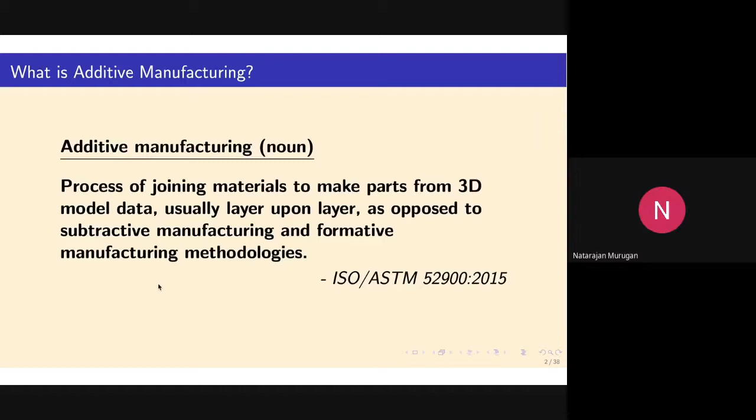Can you see my screen again? Yes sir, we can hear sir. Slightly increase the sound, the audio, slightly. That's all, okay good sir. Can you hear me now? Yes sir, yes sir. Okay fine, good, so sir.

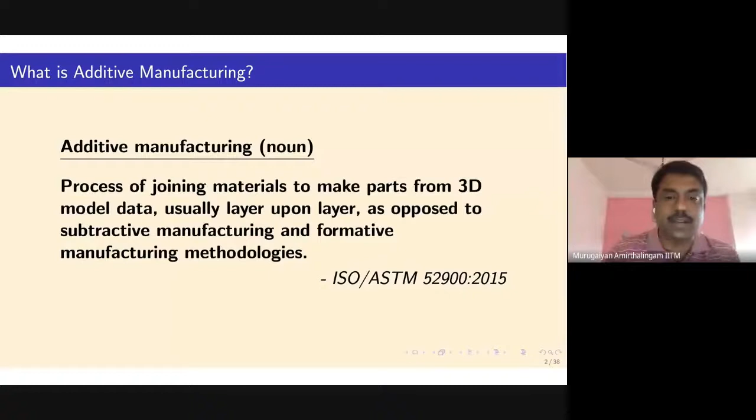In additive manufacturing, we create a component directly from its CAD data, generally layer by layer. In subtractive manufacturing, like casting, forging and machining, we don't do this; instead we create an object and then do post-processing like machining or surface finishing for the in-service application. Whereas in additive manufacturing, we create an object directly from its CAD data, usually layer by layer, and this requires careful manipulation of the CAD data to create a two-dimensional layer, then subsequently fill the layer based on optimization, so the component can be produced by adding multiple layers to get the final 3D component.

And this process is not new. People talk about additive manufacturing or 3D printing, but we have been doing this process for several decades. The process of creating a layer by layer deposition is nothing but welding - we do multi-pass welding with a consumable wire, depositing bead on bead, which is a multi-pass deposition.

In welding, the mechanical and thermal boundary conditions are different than what we have in additive manufacturing. We used to call welding-based additive manufacturing as weld overlay, but now the terms have changed because we can use the same welding heat source, like arc and plasma, or laser with a wire or powder.

We can create a layer by layer object, so people used to call this a rapid prototyping or rapid manufacturing technique, or solid freeform fabrication, especially if we use friction deposition, the tools used for friction welding and friction stir welding. Those welding processes can also be used to perform layer by layer deposition.

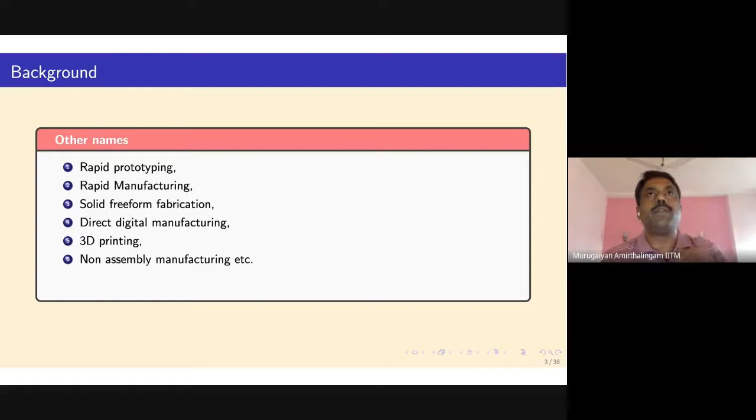Those processes are known as solid freeform fabrication, digital manufacturing, 3D printing, non-assembly manufacturing. People call this process various names, but all of them denote the same technique, what we refer academically and more globally as additive manufacturing.

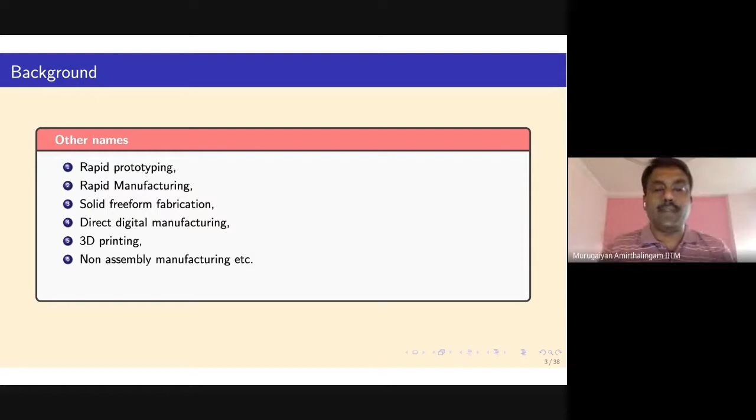Whereas if you use additive manufacturing, we create a spherical object by first slicing the sphere into several layers, and we create it layer by layer, with layer upon layer added to visualize the sphere.

The advantage of this process is we can create a component directly from its CAD data, and we can also create complex geometries by carefully manipulating the slicing and path planning programs. We can also control the mechanical properties layer by layer.

If you want to change the layer composition in between to introduce some functional gradation, if one layer should be in different composition than another layer, that is also possible. Therefore this process is becoming very attractive to produce components with enhanced in-service performance.

For example, in our group we have been working on developing components for aerospace and naval applications with mechanical properties far better than what we make with conventional subtractive manufacturing.

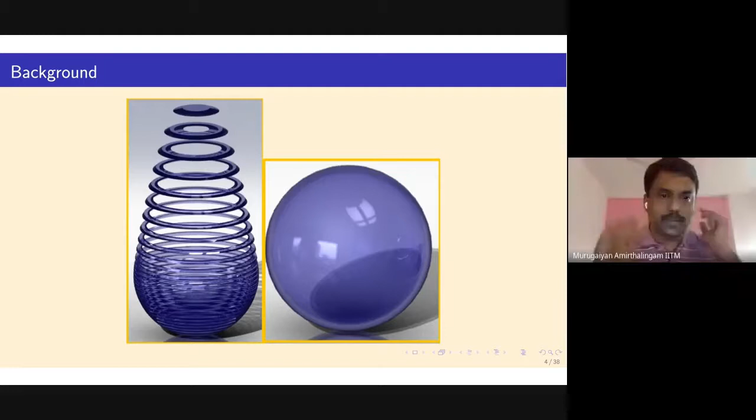Hello? Hello, sir, sir - someone is interrupting, someone is trying to ask a question. Okay, fine, maybe some disturbance. Okay fine, we'll continue.

As I said, this process is not new. Welding-based processes have been there since the 60s, but we did not call it additive manufacturing. But if you look at the first real 3D printing, it was patented in 1981 by Charles Hull.

Charles Hull, in the US, patented the first process where he produced a prototype from a polymer using a technique known as vat polymerization. He named the technique stereolithography.

That is the first patent granted on this process, where an object is fabricated from its CAD data directly, layer upon layer. That happened in 1981, and the stereolithography process is based on the vat polymerization technique. Charles Hull then developed equipment which could produce polymer-based prototypes.

He started a company known as 3D Systems, which is one of the leading 3D printing equipment manufacturing companies. From 1981 to 85, a lot of people tried to produce prototypes using a polymer-based process.

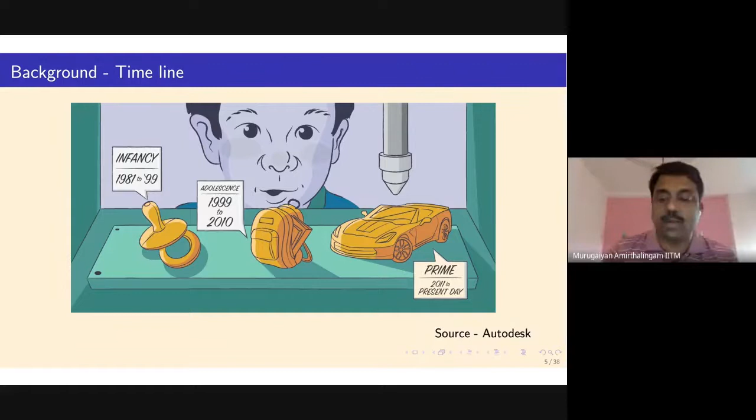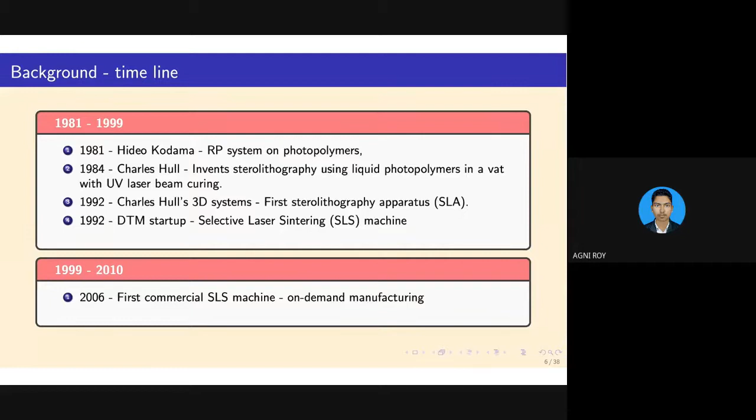Can you mute, please? Okay, yes sir, this is the timeline. I want again, further—what, hello? Hello sir, can you please— please don't disturb, please. Mute your microphone, please. Don't disturb, please. Okay, sorry.

So the timeline we just discussed: in 1981 the first paper was published in Japan, and the patent was given to Charles Hull on stereolithography using photopolymers—the process known as the vat polymerization process.

Right now we are in the prime, as I said. We have been talking about equipment used for various engineering alloys, and subsequently using the engineering component for extreme applications. Right now we are working on developing printing parameters to produce components for our hypersonic missiles. So we are moving towards the use of components made using additive manufacturing for extreme applications.

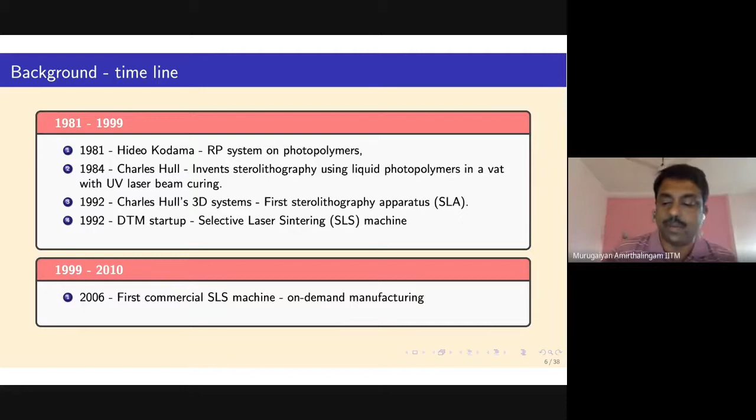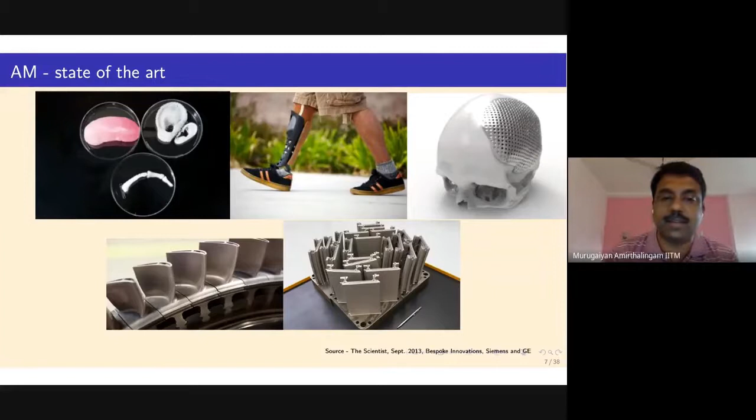We love to see this as a very attractive technique, especially for calamities and disaster management, to instantly provide shelters and help soldiers serving at the border. If they want to build a shelter, it can be built within no time using a layer-by-layer technique. At IIT Madras, we have a similar structure already built using additive manufacturing to demonstrate that this technique can really be used in real applications.

Good, so with that, we'll move on to the actual processes. If you look at additive manufacturing per se, there are only 7 processes - we can categorize these additive manufacturing processes into 7 categories. We'll quickly look at what these processes are, and then we'll move on to the topic, which is slicing and part planning.

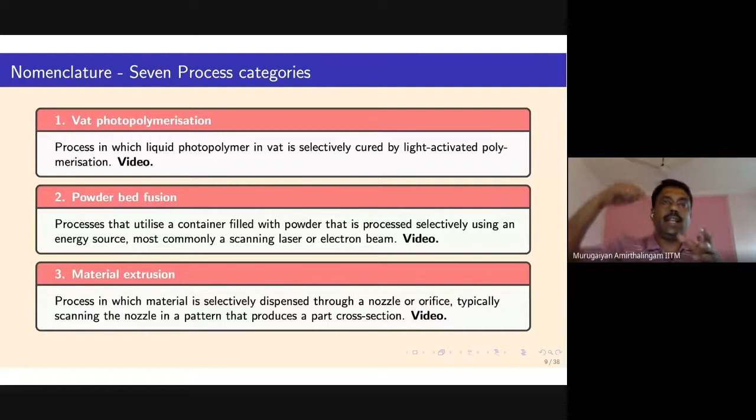So we use that technique - if you have a photopolymer in a container, and a laser or UV light falls onto a specific location, only that location gets cured. We can use this technique to selectively cure parts of the photopolymer kept in the vat.

In this process, we have a photopolymer in a vat, and we pass the laser or UV light selectively so that the layer which gets the photons cures and solidifies. When we lower the vat and fill with more photopolymer for the next layer, it gets attached to the previously solidified layer. Then we can manipulate the scanning strategy or plan the laser path to create a complex shape by selectively curing the layer. This technique is known as the vat polymerization technique.

And vat polymerization technique is also commercially known as SLA, stereolithography apparatus. So that is the commercial term given by 3D Systems. But the more academic generic term is vat polymerization technique. So the second technique of additive manufacturing is also known by various names.

But we call all the processes which use a powder bed and a laser or electron beam a powder bed fusion system. In the powder bed fusion system, we have a container filled with powder, and a heat source scans over the powder. Once the heat source interacts with the powder, it either melts and solidifies to create a solid bead, or the powder can also get sintered to create a solid bead.

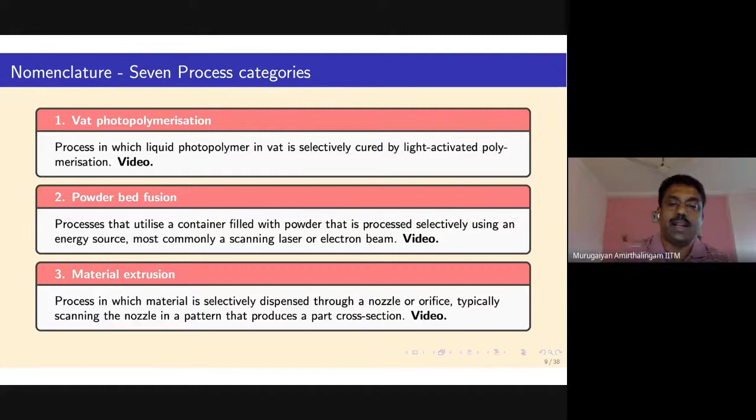This is also known as filament extrusion, so filament-based processes. These all work under the principle of material extrusion. FDM, for example, fused deposition modeling, is also a part of the material extrusion process, where a feedstock wire is extruded and deposited onto a substrate, and it solidifies subsequently to create a solid object.

And the fourth process is the material jetting process, in which a liquid feedstock is jetted onto a substrate, similar to our inkjet printing. The liquid feedstock is made to travel through a nozzle or orifice, and the droplet is deposited onto a substrate the way we want, to create a layer. The jetted droplet either gets cured by a photopolymerization reaction or by natural curing, like a wax. This process is very attractive because the feedstock is liquid, and we can create very small, tiny layers because we can control the jet we are ejecting, similar to what you do in an inkjet process.

And the fifth process is the binder jetting process. It is similar to the powder bed fusion system, whereas in binder jetting we jet a binder onto a powder bed. The powder bed can be ceramic or metal powder, and the binder is added selectively to the locations where we need a binding action, a curing action. Then we create a green part, which can be taken out and cured to create a brown part, and the brown part can be used after infiltration, for example, as a final component.

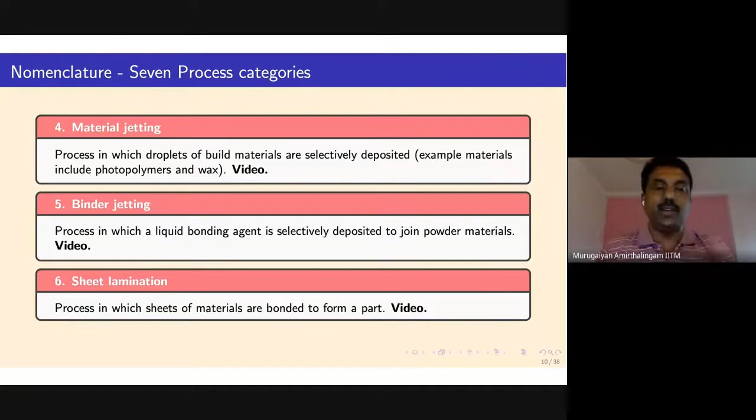And we can also attach thermocouples in the component to identify the temperature at the component immediately. So these kinds of applications use the sheet lamination process. And I do have a video, but because of the time constraint I don't want to play every video. If you want, you can also look at some of my lectures on YouTube and get some more information on this.

Good. So the seventh process, which is also similar to what we do in welding, is known as the directed energy deposition process. In the directed energy deposition process, we have a heat source and a feedstock, either a powder or a wire. The powder or wire is added, and the heat source can be an arc, plasma, laser, or electron beam. This heat source melts the wire or the powder which is getting deposited. Subsequently, the molten droplet is transferred to the base material.

This is similar to what you have in welding. So during this deposition, we can move the heat source along with the feedstock so that the droplet can be deposited on the locations where we want to get the layer built. So this process is known as directed energy deposition.

And a lot of commercial names are available, for example LENS, laser engineered net shaping. So it is a directed energy deposition process. Or WAAM, wire arc additive manufacturing. That is directed energy deposition. Or EBAM, which is Sciaky's brand name, the electron beam additive manufacturing process, or the electron beam melting process. So they are all what we can call directed energy deposition processes. Good.

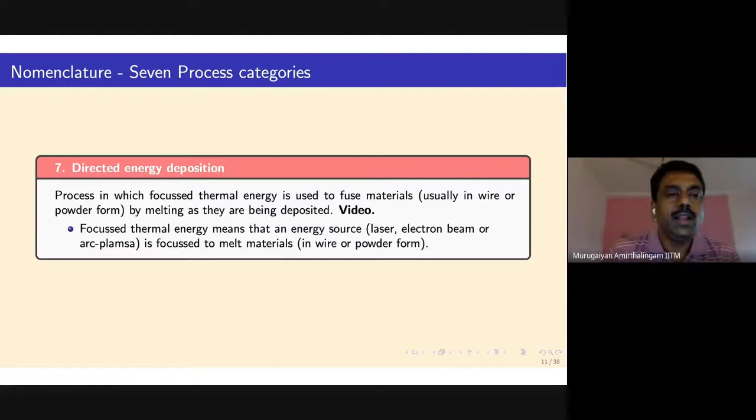So if you look at all the seven processes, we have a common process chain. First we identify what material we want to use to make a component in a given technique. So we identify what process can be effectively used to create a component out of this material. That is our first exercise.

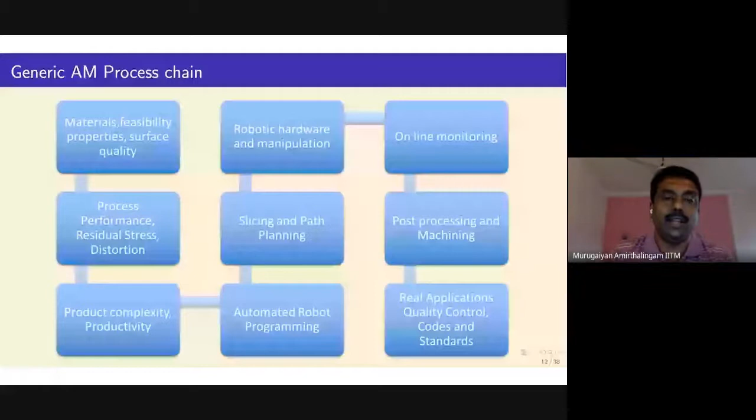For example, if you want to build an acrylic prototype, you cannot use a directed energy deposition system, DED. You can never produce that, because polymers are very difficult to control in their melting behavior with the laser or electron beam. So to produce a prototype using acrylic, the best we can use is the vat polymerization process. Similarly, we do a careful analysis based on the materials and the surface quality we expect from the final printed components. We can identify which process is best suited to produce these components.

Right, so once we identify the materials and the process we want to use, then we do extensive mathematical modeling to understand the material behavior when we do printing, including the process simulation. So when you are depositing a single bead, how is the bead going to shrink when it either polymerizes or during solidification? So that we can adjust the actual deposition speed to create the required geometry of the bead.

And when you do multi-pass deposition in a thin wall, because of the excessive heat we add, it can also induce residual stress and distortion. And we need to correct that distortion as and when we build, because otherwise you would need to machine it later. So we can correct the distortion when we build layer by layer. So we do extensive mathematical modeling to understand the process performance and the residual stress and distortion. One of the exercises we do is the calculation based on the residual stress and distortion evolution to identify the effective path in which we can fill a layer.

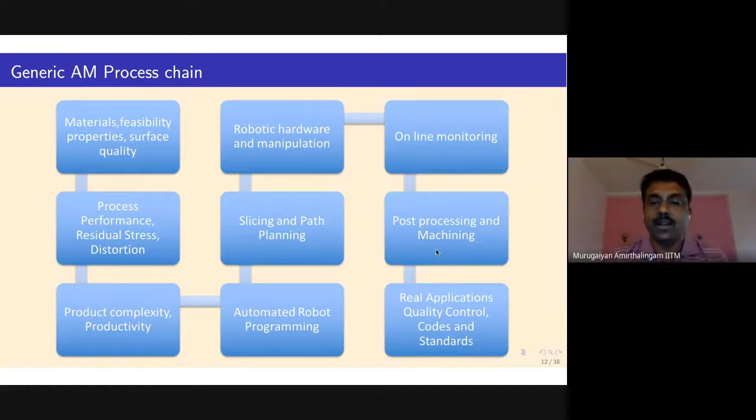Once we have the paths generated, we generate G-code and M-code and give it to the robot, and subsequently we can monitor and print the component and take it out. If any post-processing is required, we do that, followed by post-print quality control. So this is the process chain we use, right?

Most of these steps require knowledge of materials and the process, the heat source behavior, and the mechanical boundary conditions prevailing during this process. So we make use of all the fundamental knowledge available in welding to generate effective ways to create components using additive manufacturing.

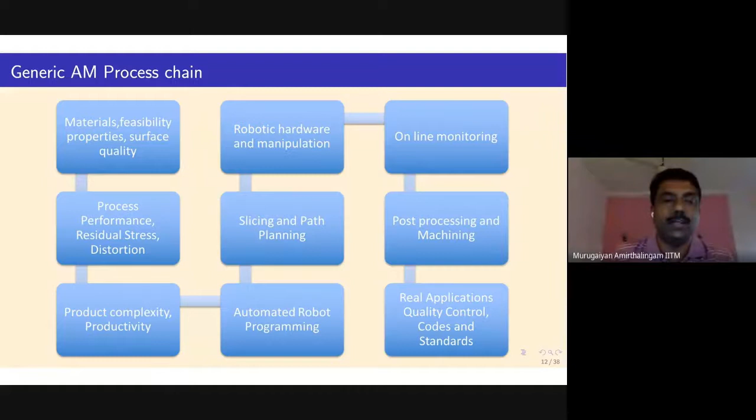So this is a simple process chain visualized using pictures. Suppose you want to print a cup to drink coffee using additive manufacturing. We start with CAD data.

The first thing you do is convert the CAD data into what's known as an STL file, okay, the standard tessellation language file, where we create from the CAD data an STL file by filling this CAD data into a lot of triangles. So we fill that with triangles, right?

And we convert, using this process, 3D data into two-dimensional data. By filling the entire geometry of a 3D structure into triangles, we can design the entire shape using a two-dimensional data set, by declaring the vertices of the triangle and the surface normal of the triangle. So each location, each point in the geometry can be carefully constructed into two-dimensional data.

Once we have the STL conversion, we slice the STL file layer by layer, and once a layer is created, we plan how we are going to fill that layer by again optimizing the paths, so that we can fill one layer and then feed the feedstock, or lower the axis of the build direction, so that we can create the next layer.

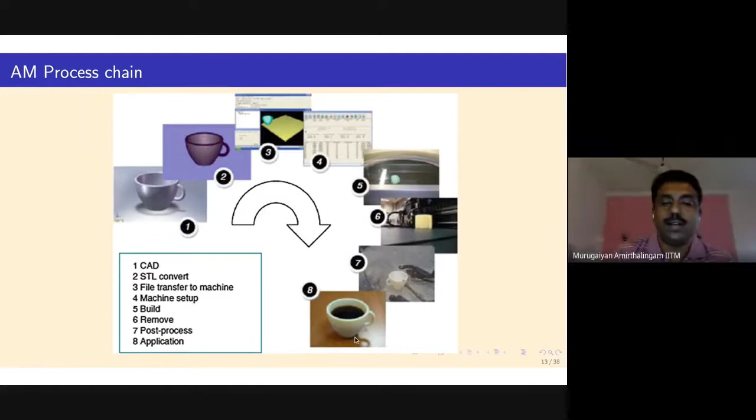So this is the actual process chain we carry out, and subsequently we can create a very nice coffee cup to drink warm coffee.

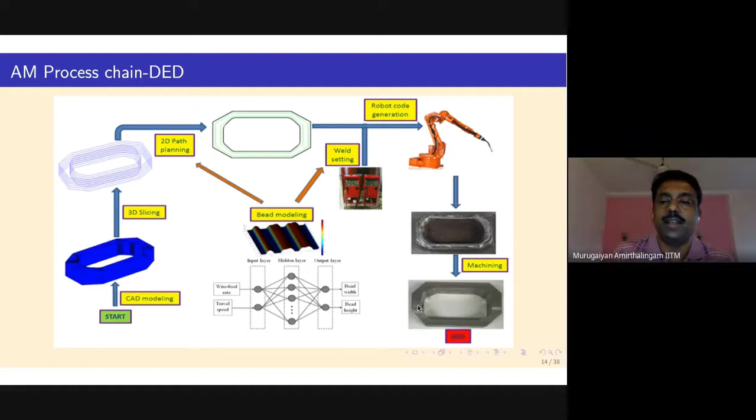Again, visualization of what is shown here: we have a CAD model, which is converted into an STL file where we fill it with triangles and do a slicing. Once we create a single slice, we carefully understand how this slice can be filled using path planning. Once you know the paths, you can generate robotic code and fill it, and finally, after post-processing, the final component can be printed.

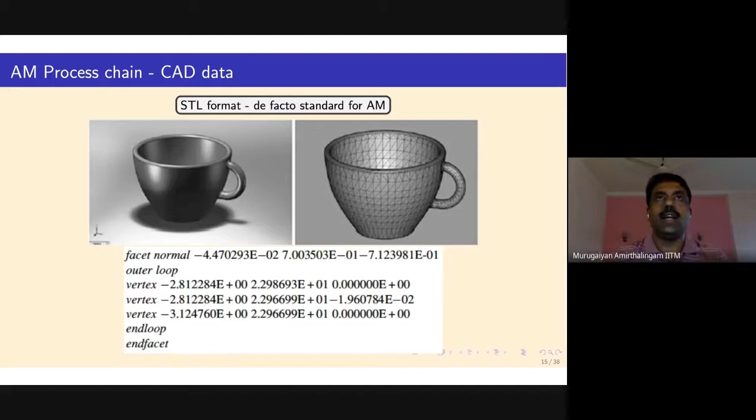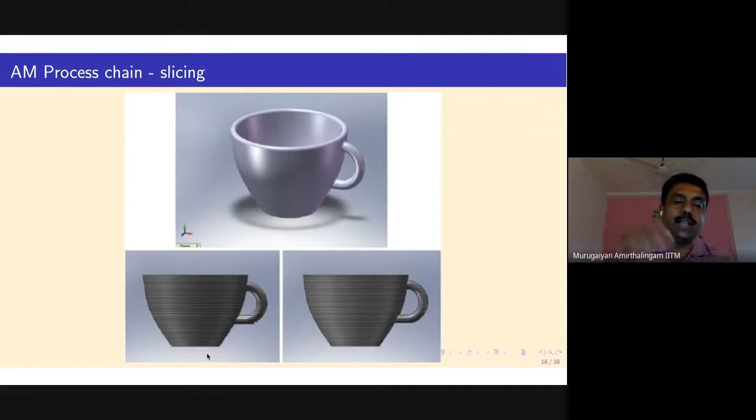Once you have 2D data, it's easy to slice because each layer is actually declared only by two-dimensional data information, right? So subsequently, once you have an STL file, we can slice it, and the slicing can be uniform slicing or adaptive slicing—we'll come back to that later.

So uniform slicing, we slice into a layer thickness that is constant across the geometry, or we can also do adaptive slicing. The adaptive slicing is also beneficial when we have a component with a varying degree of curvature.

Adaptive slicing is very beneficial to achieve a good surface finish and avoid the so-called staircase effect. Once you have adaptive slicing, we can identify a slice component with respect to the actual intersection of the cutting plane with the triangles described in the STL file. Once you know the intersection points, we can connect them to create the actual layer.

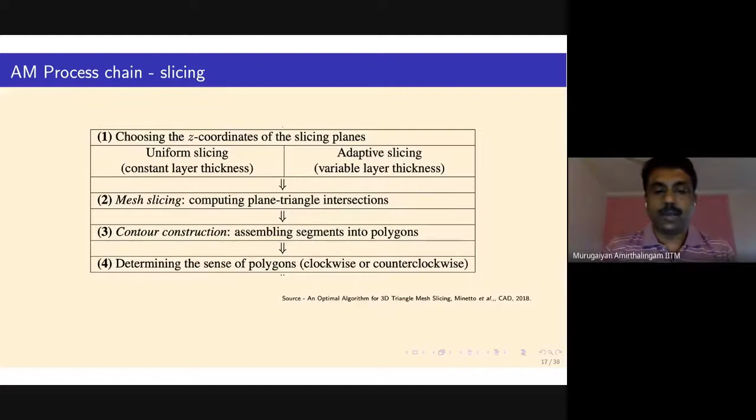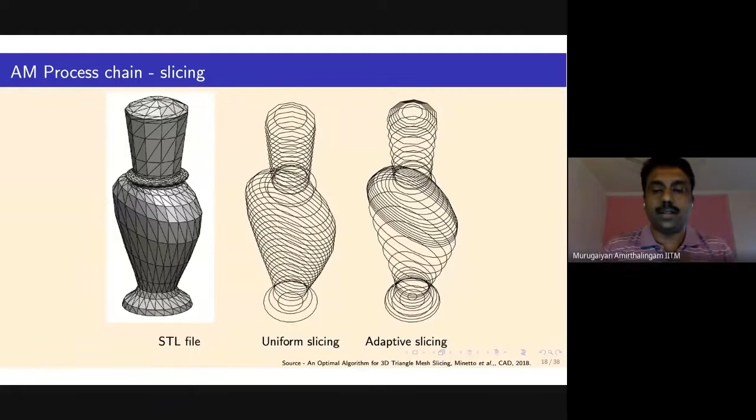This is an example of an STL file with triangulation showing uniform slicing, where the slicing is constant, or you can make adaptive slicing so that the curvatures are obtained without much deviation from the geometry. Adaptive slicing is generally done to achieve a good surface finish and nice geometrical accuracy as required by the produced component.

Say for example you have a curvature like this, and if you have a constant layer thickness, you end up getting staircases - that's what you call the staircase effect. So we use an algorithm to achieve the required geometry and surface finish by using adaptive slices. You can see how effectively adaptive slicing can be used to get the required geometry generated when we print layer by layer.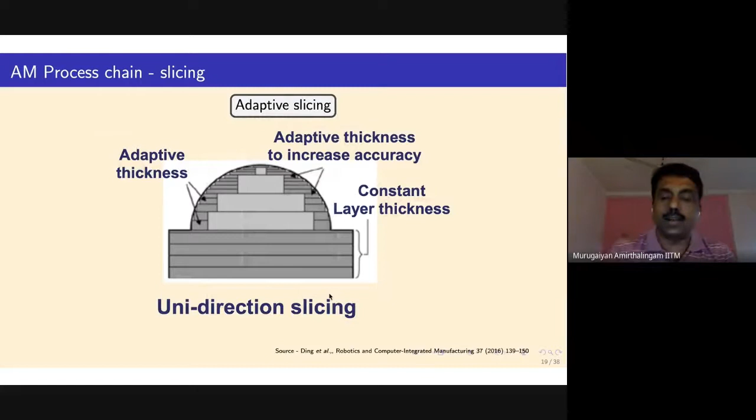The slicing can also be multi-directional. Right now this is unidirectional slicing, done in only one direction. If you have overhanging features, we have a problem. Suppose you want to produce such a component for end use - if you do uniform slicing, you'll have to have a support structure made. Otherwise we can't generate an overhanging feature.

So for that, what we do is what we call multi-directional slicing. We slice it up and change the direction of the slicing, so that we have avoided the support structure requirement to generate the overhang feature.

The only problem is when you're actually using a laser or electron beam as a heat source and it's downhand - we'll have to make sure the component is tilted to the correct angle using a 2-axis rotation table. That is the best way we do it, because when you manipulate the heat source, the heat transfer and droplet transfer, especially in DED processes, is very tricky. So multi-directional slicing for DED processes is always carried out with a 5-axis system.

This process, multi-directional slicing, is generally not used for powder bed systems because you already have the support of the powder. So multi-directional slicing is primarily advantageous when used in a DED process.

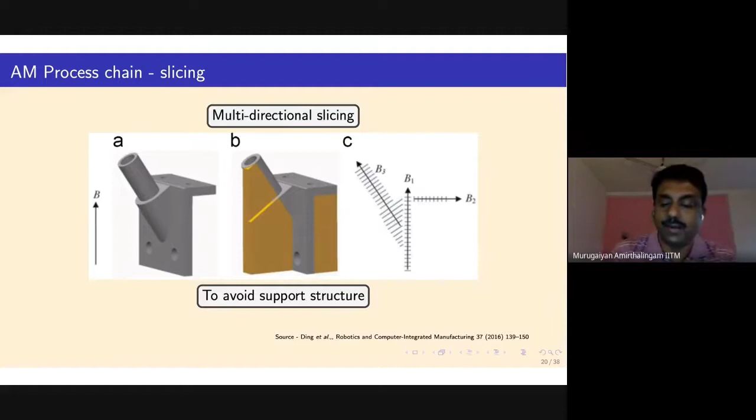These are some examples of multi-directional slicing - this is a gland made using Inconel 625, which we can develop using a DED process and slicing. We also have adaptive slicing and multi-directional slicing, and this can be realized very easily.

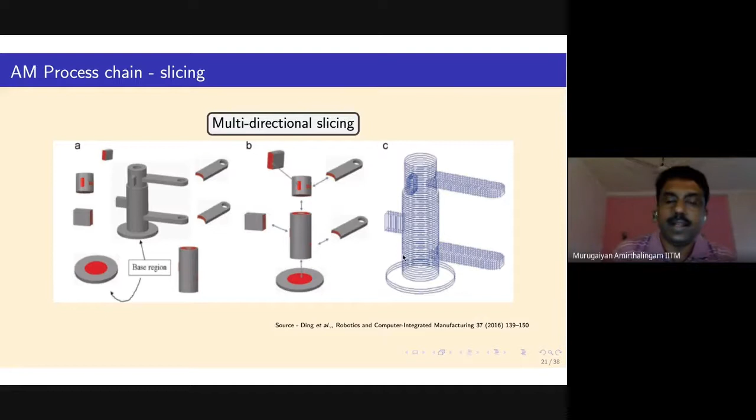So once you have a slicing, we'll have to identify for each slice layer how we are going to fill it, by carefully understanding the path planning algorithms. So this is again to summarize the slicing process.

We have a shape, say a cube with a void inside. We fill it with triangles, then slice it, identify the intersection of the slices with the triangles, and connect all these intersection points to get the actual slice layer.

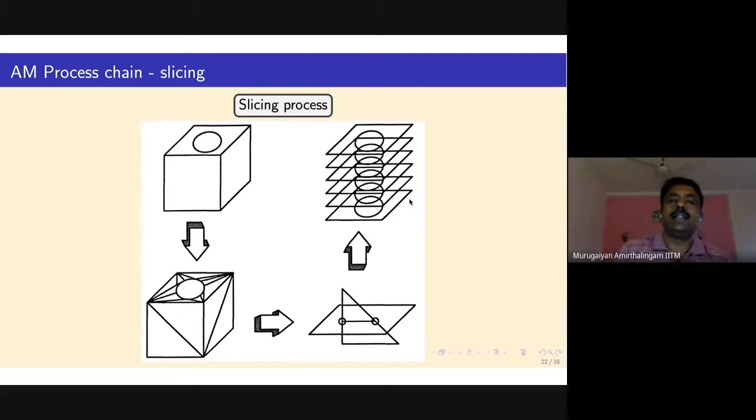Once you have a slice layer, we'll have to fill that slice layer with beads. So the laser or electron beam heat source moves, either in the powder bed system or the DED system, or even in other manufacturing processes like material jetting or binder jetting, to create a bead. Here are some nomenclatures before going into path planning.

The bead is nothing but the actual geometry of the single deposit we create - the bead height and width, and this is the substrate. Suppose we have a powder bed and the heat source, we create a molten layer which subsequently solidifies - that is what we create, and this is the actual bead we call it. Bead height and width is determined by the heat source characteristics and the heat transfer prevailing in the atmosphere, which we can calculate from physics for a given laser heat source.

So what is the material we are going to melt, and when the melt solidifies, what is the actual geometrical shrinkage it undergoes? Now we can create the actual bead in the computer using a thermodynamic-based solidification model with information about the fluid flow, so we can understand the bead geometry.

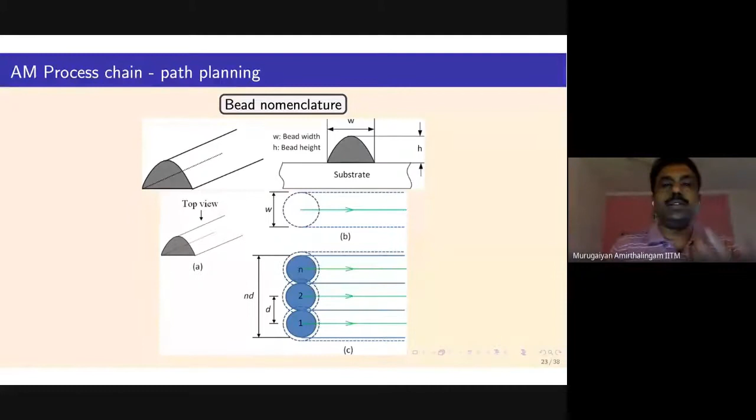I'm not going to go into detail about how we calculate the bead geometry, but once you have the beads, we can identify how the deposit is going to take place, to optimize it.

Some basic understanding in multi-layer deposition: first, we make sure we understand the bead geometry, height and width. Then we calculate the overlapping distance required to achieve a flat layer. This is known as the step-over distance, or in commercial terms, hatch distance.

Once we calculate the bead width and height, for the next layer we deposit a second bead, and the overlapping distance should be such that the critical valley and the overlapping areas are the same. If the overlapping distance is too small, we get a lot of valleys left; if the overlapping distance is too much, we may get what is known as humping, and the dimensional accuracy is hampered.

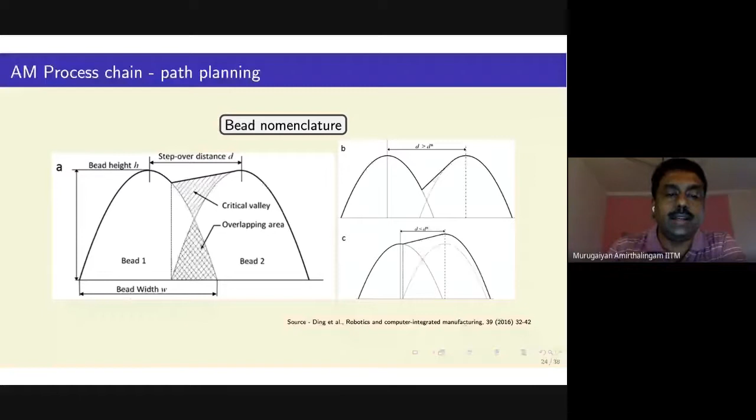So again, we calculate from the bead height and width characteristics the overlapping area required, so that we get a very nice flat surface, as shown here in C.

If the step-over distance is too high, we get a valley generated by inadequate overlapping, and if the overlap is too much, we get dissimilar beads created. If it's very small, you'll get a humping bead. Generally we identify the critical step-over or hatch distance to get overlapping such that the critical valley equals the overlapping area.

Once we identify the bead geometry, the next step is how to fill a given layer — that's where path planning comes in. Path planning is about filling the slice we create without any crossover, and achieving defect-free deposition.

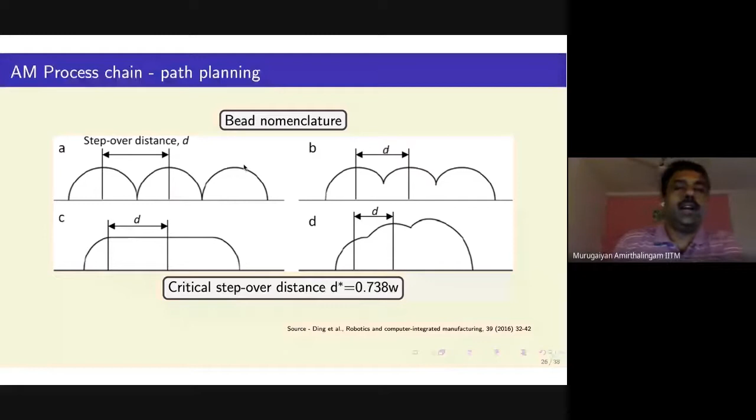Some considerations we make to fill a given layer: it can be filled using raster, zigzag, contour, spiral, or a mix of these. I'll give some examples of this path planning, and then how we optimize the path based on mathematical modeling.

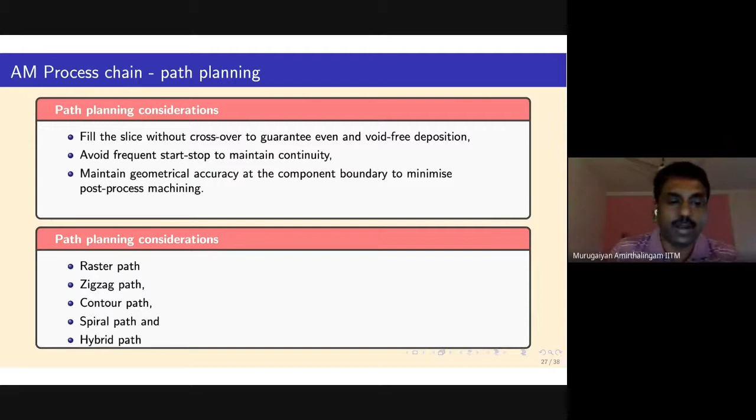The raster path is very simple. In raster path, we divide the area we want to fill and start filling using simple rastering. If it's in X and Y, we move in the Y direction to make one bead, then move in the X direction to make another bead — so you can make a continuous raster. This process requires a start and stop, isn't it?

So suppose if you're doing unidirectional or bidirectional, in the unidirectional case, it moves in only one direction, and subsequently we fill the area you want to create. This is not that an effective process, the rastering, and it can create a lot of residual stress that we'll see in subsequent slides.

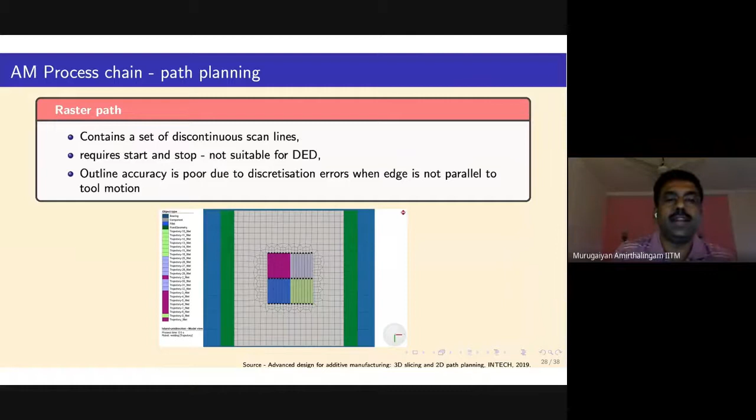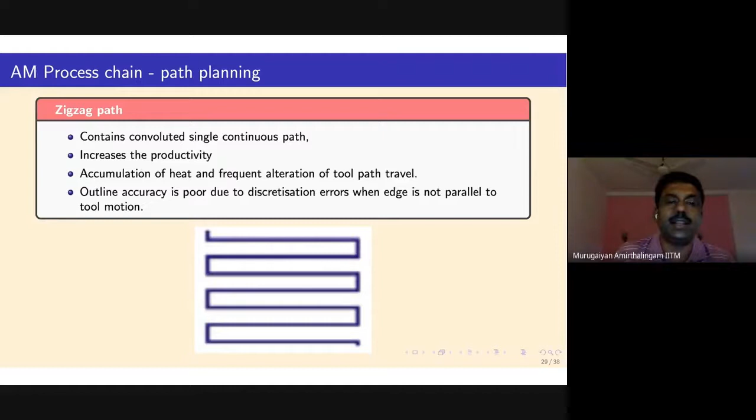In a zigzag path, instead of moving unidirectionally, we move in a zigzag, in X and Y. It can create a continuous path without stop and start, with very high productivity. But this is a nasty process because we end up accumulating heat inside the component due to the continuous movement of heat in a given location, and the accuracy in the outline is very poor. If you have nonlinear geometries, the zigzag path can create poor accuracy.

The spiral path - as a mechanical engineer, you've already been using this spiral path for machining, like in CNC milling, where we do it in a spiral path. This path can also be used mainly for certain geometries which require very nonlinear surfaces.

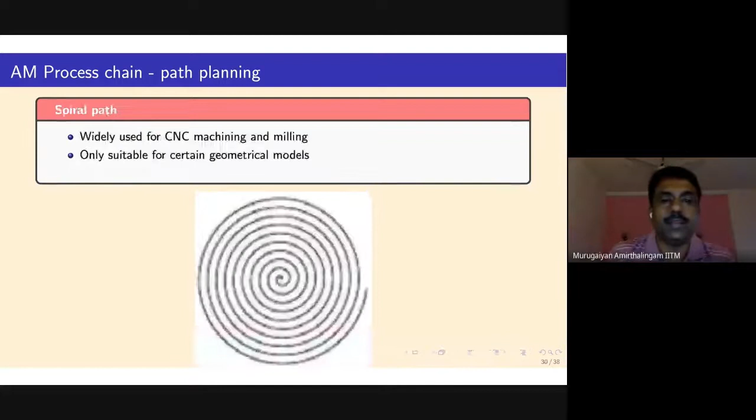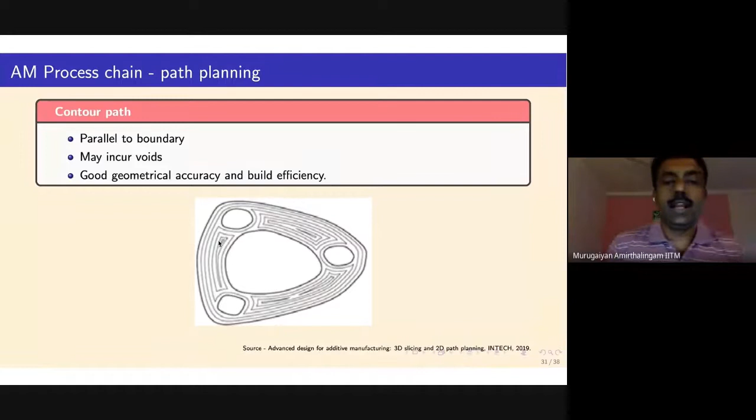The most common path we take in additive manufacturing is known as a contour path, using a conventional zigzag, raster, or spiral path. So we fill, suppose this is the layer, always parallel to the contour. The layer is generated by just moving the heat source parallel to the contour all the time. This process is slightly advantageous for achieving dimensional accuracy, but it creates a lot of voids, especially when you fill at the middle, where you always have irregularity due to lack of fusion. You get good productivity, but achieving a good defect-free component is very difficult using a contour path.

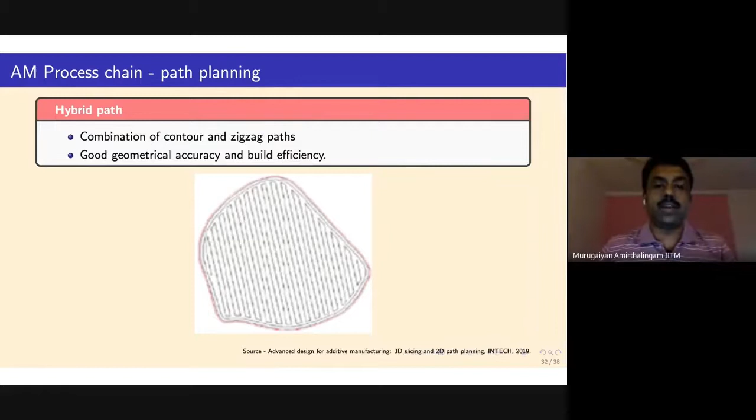We can also use a hybrid methodology where you first make a contour path to achieve the contours, and then subsequently do a zigzag path to generate the final layer. This is good for achieving geometrical accuracy, but it's extremely bad because when you're doing a zigzag, you end up containing the heat in the component, which can lead to a lot of damage in terms of microstructure and residual stress. So that's the issue when you use the hybrid path.

Based on these disadvantages in all the processes we looked at, people thought about this and came up with the most effective way of filling the layer, known as the MAT path. The MAT path is actually very simple to understand. Instead of creating a component by following a contour - and if you follow the contour, we end up producing a lack of fusion at the middle - you may have voids created at the middle. So instead of that...

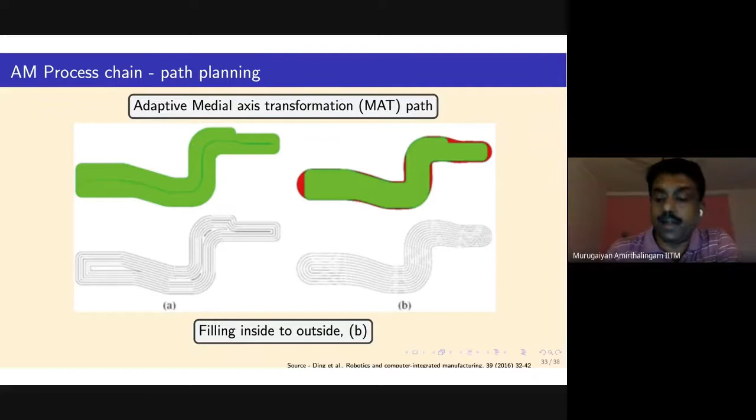In the MAT path, what you do is generally identify the medial axis of the component, and instead of starting from the outside, we start from the medial axis. We start from the middle, the medial axis, and subsequently from the inside we go out and complete the entire layer, filling from inside to outside. That's what we call adaptive medial axis transformation, where we start from the medial axis at the middle and subsequently fill it up layer by layer. This can also use adaptive beads, and we reach the contour once we've identified and followed the medial axis continuously. This is the state of the art right now in path planning, where we can generate a defect-free component in a DED process, or even any other process requiring good dimensional accuracy.

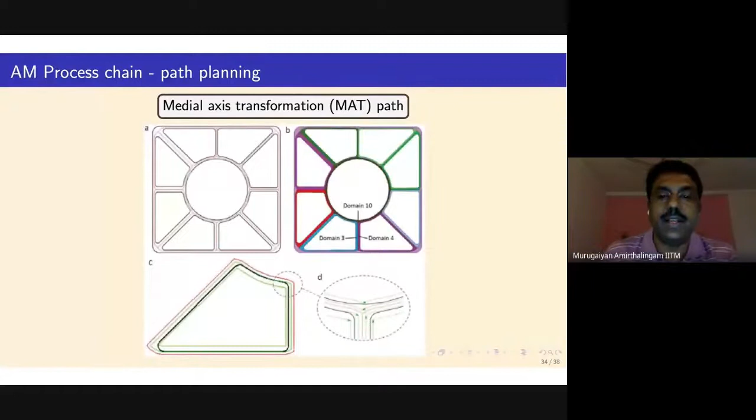One example of using the medial axis transformation path is to generate a reinforced panel for an aircraft fuselage. First we have the geometry and the medial axis identified, and then we follow the medial axis from the inside to outside to fill the entire layer by following its medial axis. This is right now used in most DED-based processes to achieve good dimensional accuracy.

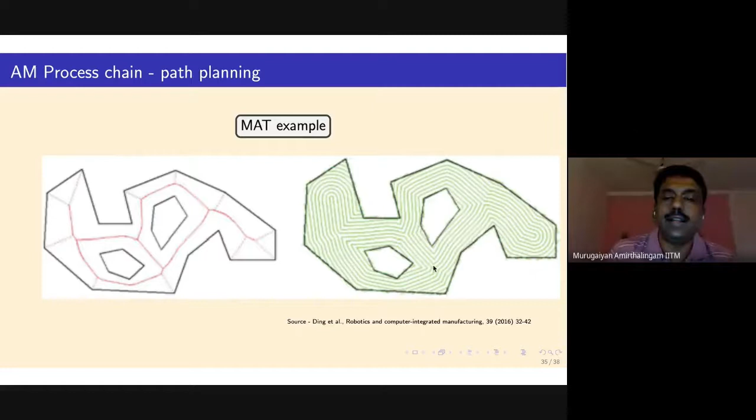So these are examples of MAT. Suppose if you want to create a complex geometry, we identify the medial axis, and then we start from the inside and follow the medial axis, and we'll end up generating the component with very good accuracy.

So the medial axis transformation can also be used in adaptive mode. Suppose if you have this complex geometry, in the contour path planning, you always have a void at the middle, a gap. So we start from the middle, and then we use adaptive deposition to create a very nice adaptive path.

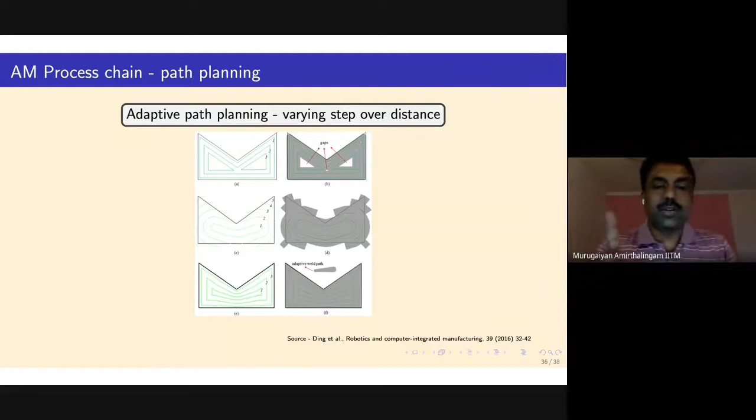I'll quickly just show you the modeling activities we do based on the MAT programming, and then we'll wind up the talk.

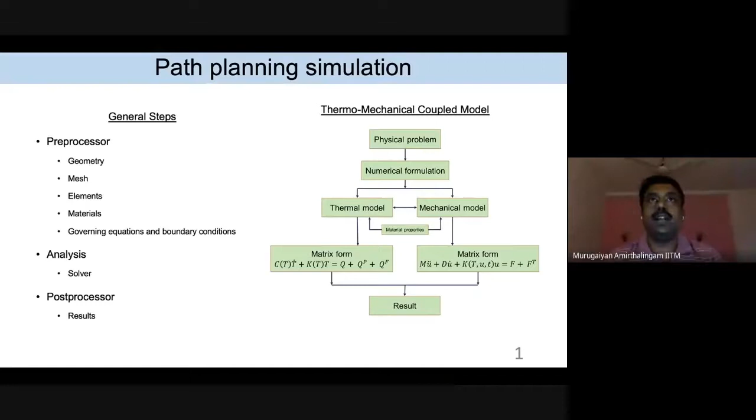In the path planning simulations, first we need to understand the actual problems, and we construct thermal and mechanical models, and we solve for a given heat source. So how the heat is evolving when the deposit is made, and subsequently using mechanical properties, thermal temperature and mechanical properties, and the boundary conditions, we can calculate the residual stress development. I'll show you some example simulations of what we do.

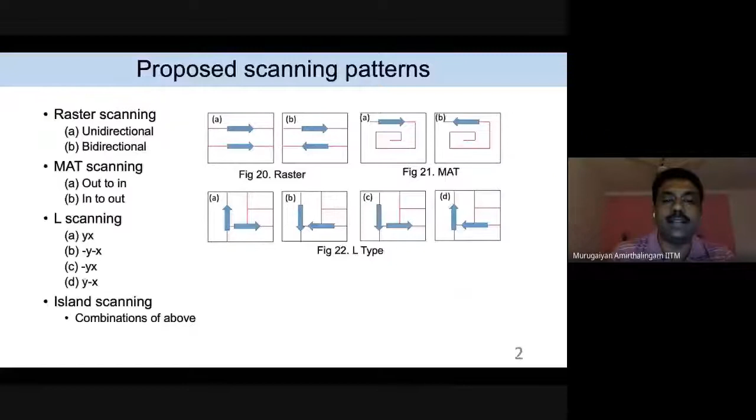For example, when you do a raster scan, or a medial axis transformation scan, or zigzag scans, or island type zigzag scans, we can get the actual path identified using an FEM-based model. This is actually used for a laser deposition process, DED process, where we have a heat source model, and then we can optimize the path.

During this deposition, you can identify, for example, when you fill it uniaxial deposition, how the heat is actually accumulated, and when you do uniaxial, biaxial deposition, how the heat transfer affects the temperature distribution of the bead. That can be calculated based on the thermophysical properties and the boundary conditions.

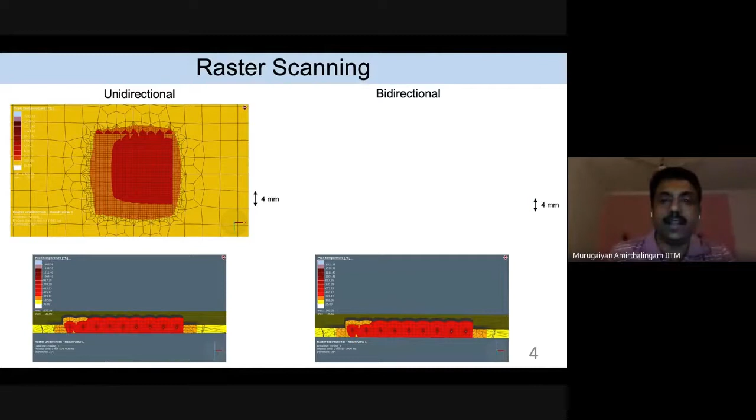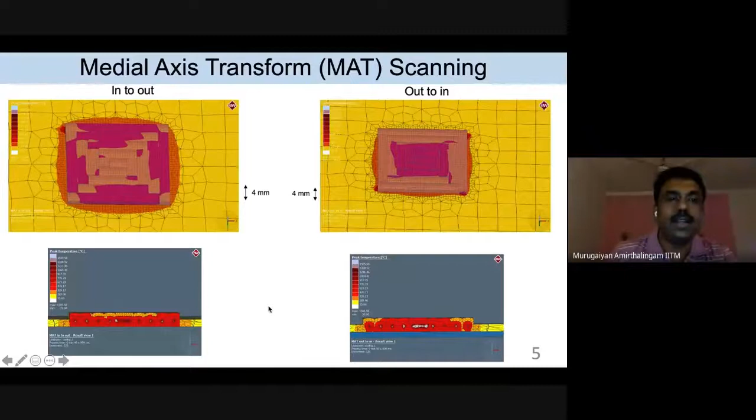You already see that there is an effect. Instead of using a simple unidirectional and bidirectional raster scan, if you use an in and out medial axis transformation, the amount of heat dissipation and damage you do significantly reduces by carefully changing the path of these layer filling, from the simple zigzag into the medial axis transformation. The temperature decreases significantly compared to the other scans.

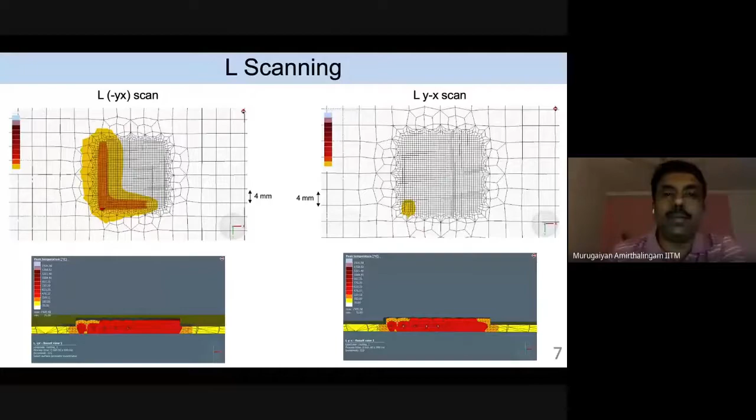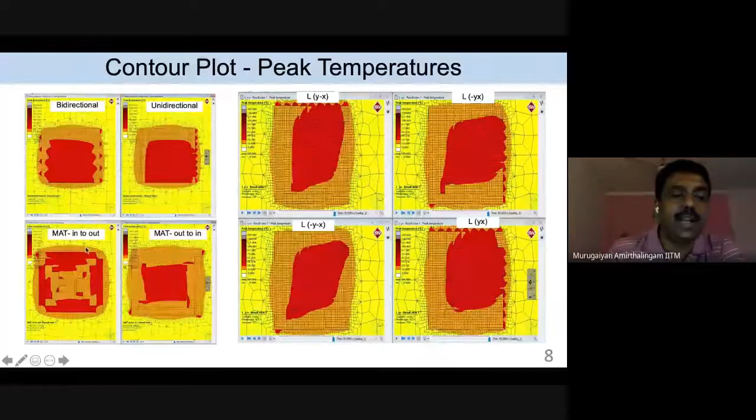If you look at the summary result of the temperature distribution, you always see that the medial axis transformation, what I talked about, always has low temperature heat accumulation compared to any other scans. So we can optimize now, what are the paths we'll have to create so that we can get a bead with minimal heat accumulation.

You'll also see that the medial axis transformation provides the least residual stress and distortion inside the component. And this is possible only by doing all this mathematical simulation and understanding the metallurgy, solidification, and influence of metallurgy on the residual stress evolution.

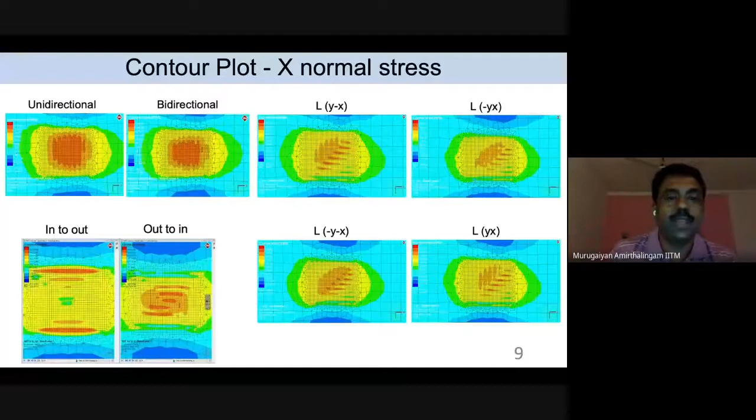So with that, I'll just end this talk. These are some of the scans. We looked at the AM process characteristics and how we'll have to understand the basics. Once we understand the basics, we can construct physically based models for path planning, which can be used very effectively to reduce the experimental efforts.

So now using these simulations, we can identify what is the best path we can take, so that we can minimize the residual stress and distortion and the heat accumulation, so that the layer can be generated without much residual stress and minimal damage to the microstructure.